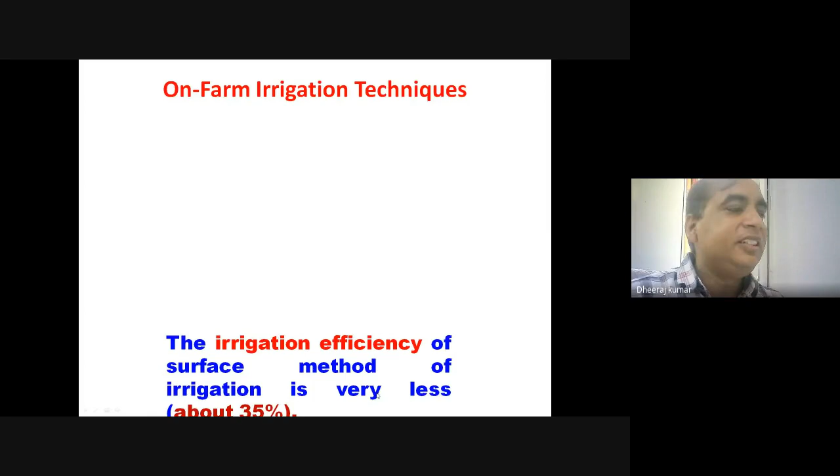Precision irrigation - the irrigation efficiency of the traditional method is only 35% or less, but in precision irrigation, efficient use of water is crucially dependent on advanced irrigation technologies. Until 50 years ago, crops in this country were irrigated by surface methods, and in that irrigation the efficiency was only 35%.

But 50 years ago, it was okay because our population was not up to 1.4 Arab - at that time it was only 30 or 35 crore population. At that time it was okay, but now, facing the problem of population growth, we have to use precision irrigation.

This is one type of precision irrigation. You see that there are drip lines and the emitters there. This is precision irrigation.

In recent times, the over-exploitation of underground water resources has resulted in an alarming fall in the depth of the water table in the command area. Due to the surface method of application, a lot of water is demanded, because we only use 40% of the water and the rest, 60%, we are just wasting as water loss. Because of this, we pump excess water from the groundwater, and this excess pumping is decreasing the groundwater table. There is an immediate need for selection of the appropriate irrigation method.

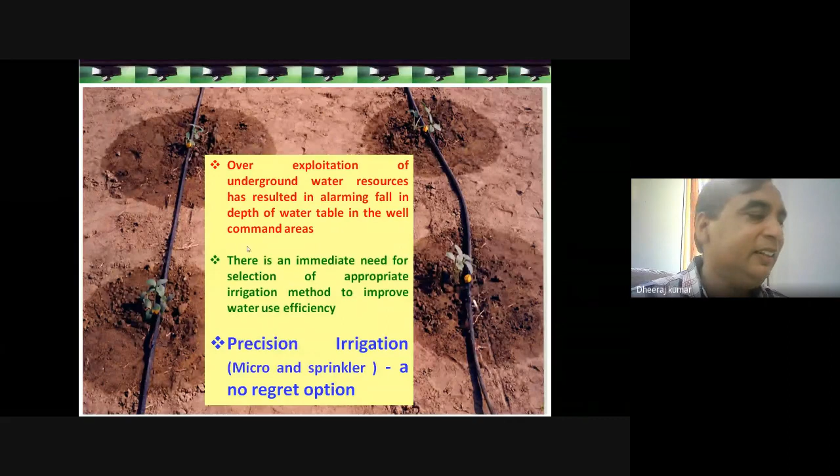If you want to stop this alarming stage, then you have to use the appropriate irrigation method, which can improve water efficiency. And this is done only by precision irrigation, meaning micro irrigation and sprinkler irrigation. In today's lecture, we will discuss micro irrigation.

Micro irrigation is an important agro-technique for efficient water use and efficient management. In micro irrigation, we provide the water and the nutrients near the plant root zone only. We are not wasting our water. We are not wasting our nutrients. We only apply the water for plant use. That's why we can get high irrigation efficiency, because we only apply the water near the root zone.

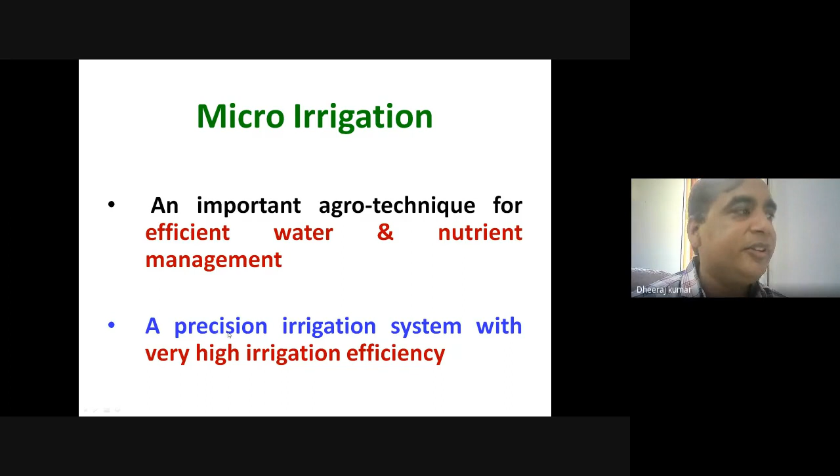There are no percolation losses. There are no weeds which can take our nutrients and water. Only the required amount of water is applied near the plant root zone.

Look here, surface irrigation efficiency is 30 to 45%, sprinkler is 60 to 70%, and with micro irrigation methods like drip irrigation, micro sprinklers, and bubblers, we can get 80 to 90% application efficiency. It means if you provide 10 liters of water to the plant, only 1 liter of water is wasted. 9 liters of water are provided to the plant and used by the plant.

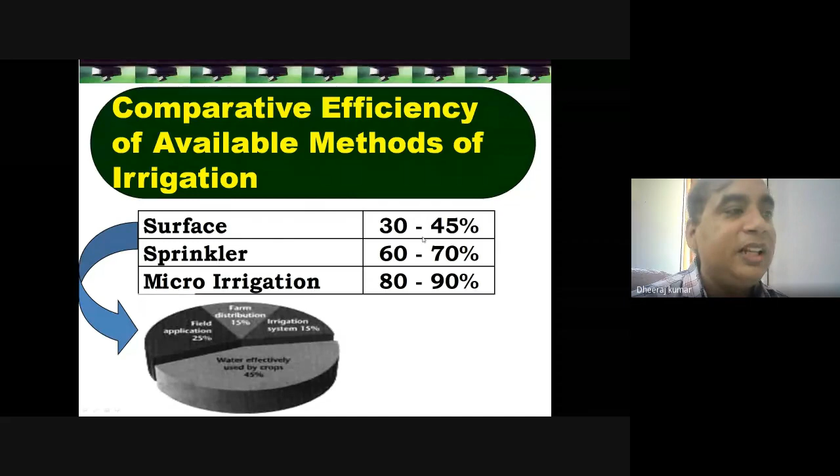In sprinkler irrigation there are 30% losses, and in surface irrigation 60% losses, meaning out of 10 liters of water, we are wasting 6 liters. These are some precision irrigation pictures; you are seeing drip lines there.

As for its development, it was first started in Germany in 1860, but Simcha Blass, an engineer from Israel, observed that a big tree near a leaking tap exhibited more vigorous growth than the other trees. Where water was leaking, he observed very good growth compared to the other plants nearby. That was observed by the Israeli engineer in 1940.

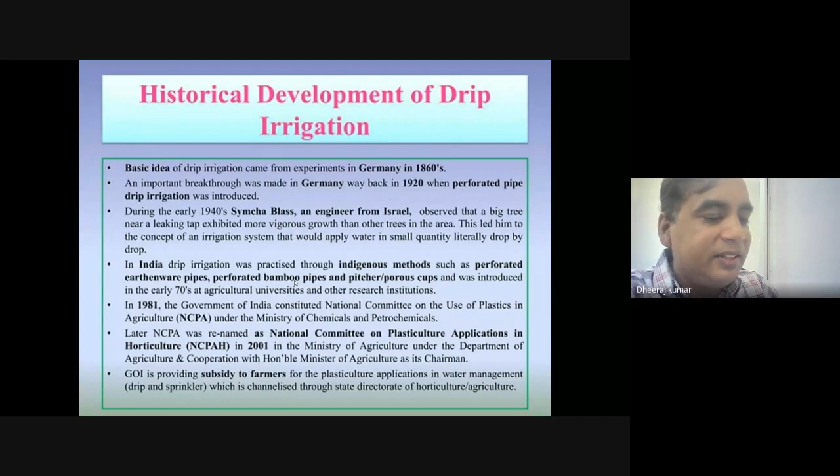After that, initially, it was implemented in the field in the form of clay pipes. We used clay pipes, perforated pipes, and bamboo pipes. But as soon as plastic was developed and commercialized, we adopted plastic in farmers' fields, with better cost management also.

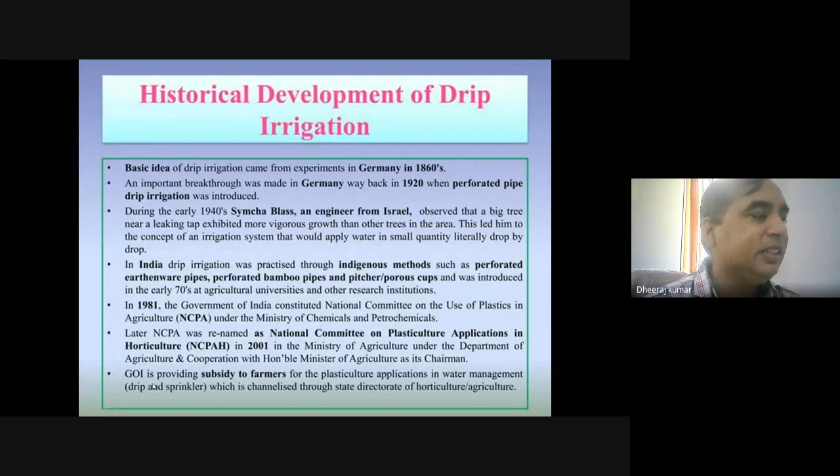In India, it was taken up by the National Committee on Plasticulture Applications in Horticulture in 2001. At present, the Government of India is also providing subsidies to farmers to install the different systems in their fields. These subsidies vary from state to state. Some states give a 50% subsidy, some give more or less than 50%. It depends on the location, the state, and the area, meaning hilly areas or plain areas, and on the condition of the farmers.

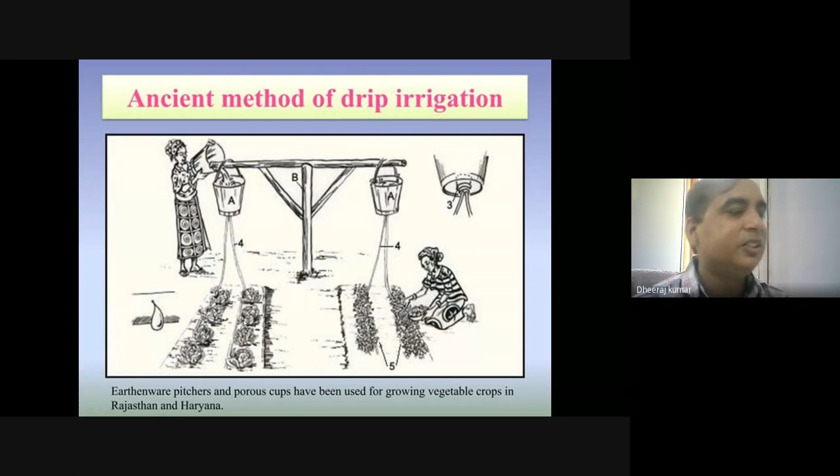Why micro irrigation? You can get efficient, effective water use and efficiency of fertilizer by this method. It means water is only applied near the plant root zone and there are no percolation losses. Only field capacity is maintained in the drip system.

Fertilizer use efficiency is higher because fertilizer is only applied near the plant root zone, and it is applied by the irrigation system. So in this, we provide water soluble fertilizer, and we inject this fertilizer in the lateral lines.

An agrotechnical advantage is that there is no soil compaction. Compaction seals the soil surface, which can reduce aeration and ultimately reduce the yield of the plant. There is no interference with farm practices. You can easily carry out your farm practices and agricultural practices.

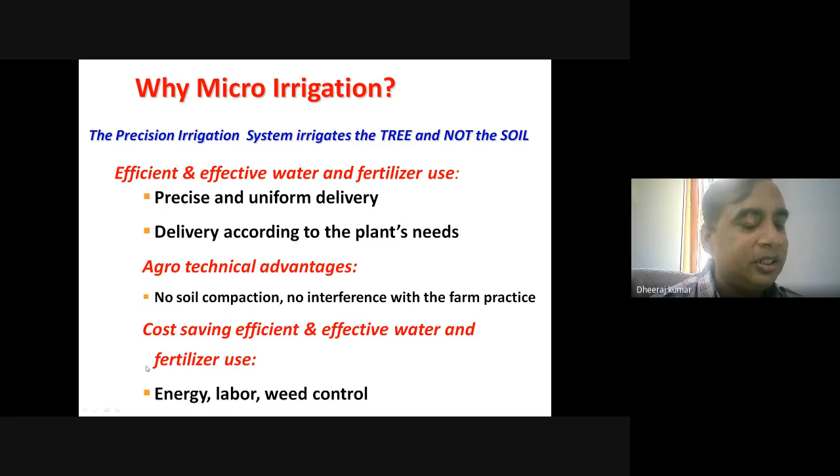It is cost effective, saving water, fertilizer, energy, labor, and weed control also. Only water and fertilizer are applied near the root zone, so no weeds will grow near the plants because you are not providing them nourishment, water, and nutrients.

What is the advantage of the drip system or the micro irrigation system? The advantage is 40 to 60% saving of water, and yield increases 20 to 50%. It reduces labor cost and gives highly uniform distribution. In this system, we can get a uniformity coefficient of 80 to 90%. It means water is uniformly distributed to all the plants.

There will be no soil erosion or evaporation. There will be no runoff over the soil surface. The water you apply to the plant completely infiltrates into the soil. If water does not flow over the surface, then there will be no erosion and no evaporation. Water is applied in optimum amount.

It also helps control disease, pests, and weeds. In deep percolation, no water will reach beyond the root zone. We can reduce deep percolation, and surface runoff and evaporation losses can also be minimized by this method. You can also use poor quality water with this method. In our area we are also facing poor quality water, and in this system we can use it with some chemical management.

High return per hectare we can get by this method. You can grow optimum crops and multiple crops in a season or a year. High water use efficiency, meaning about 90% water use. No need for drainage systems, since water is not lost to surface runoff or beyond the root zone. Fertilizer efficiency will be higher.

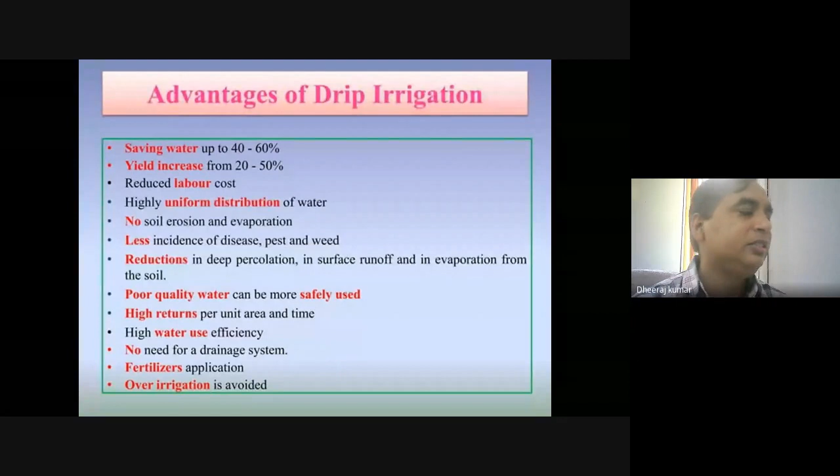The disadvantage of the drip system is that it requires very clean water, because if you do not use clean water, there will be a problem of clogging of the emitters. We have very small openings in the emitters, and if you introduce high density leaves in the water, your emitters may clog. The small openings can be clogged by soil particles, organic matter, mineral sediments in the water, and algae growth.

Sun radiation also affects the life of the drip system, because drip system components like laterals, main lines, sub main lines, and emitters deteriorate with time if the sun falls directly on the surface of the emitters and laterals. It will reduce the life of the drip system.

Our system can also be damaged by animals, rodents, and insects. Animals may look for their food fallen on the system and can destroy our system. Rodents and insects can chew the components and damage our systems.

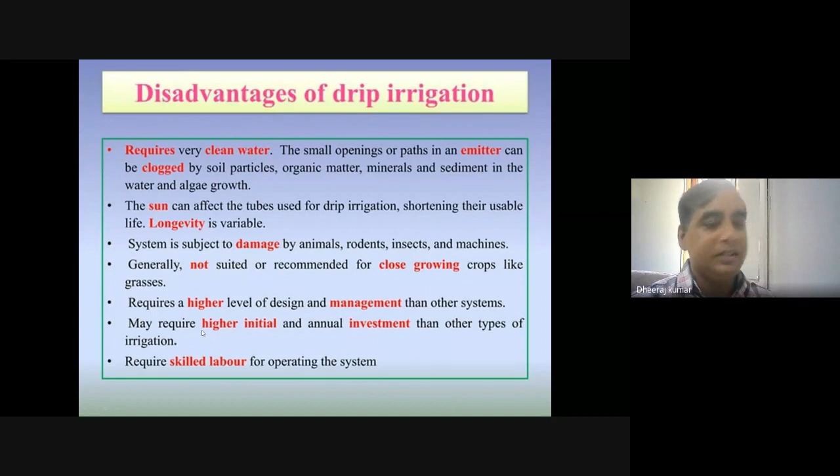In precision irrigation, we can get the answer to four questions: how much, when, where, and how. How much water we can apply, we can do by precision irrigation. When we have to give water to the plant, at which stage the plant requires more water or less water, we can manage by this system also, precision irrigation.

And where we have to apply the water, only to the root zone, we can do by this method. With surface methods like border, we can't get the answers to these questions. And how, which method we can use, like sprinkler, micro sprinkler, drippers, bubblers. We can use these methods in the system.

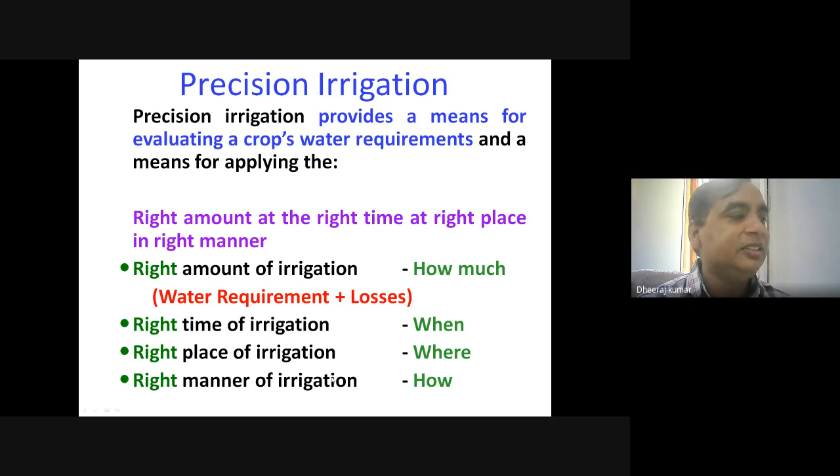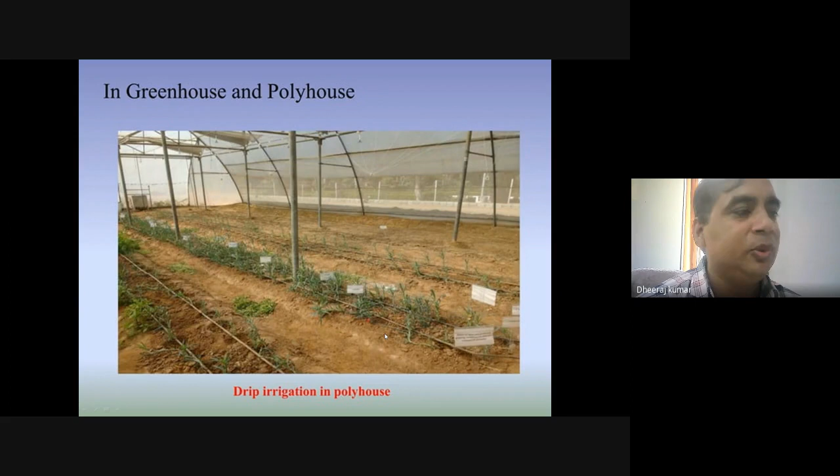If you are investing too much money on a polyhouse, then you also use the optimum amount of water, and the optimum amount of water you can monitor only by drip system methods. Means we are using the drip system in the polyhouse.

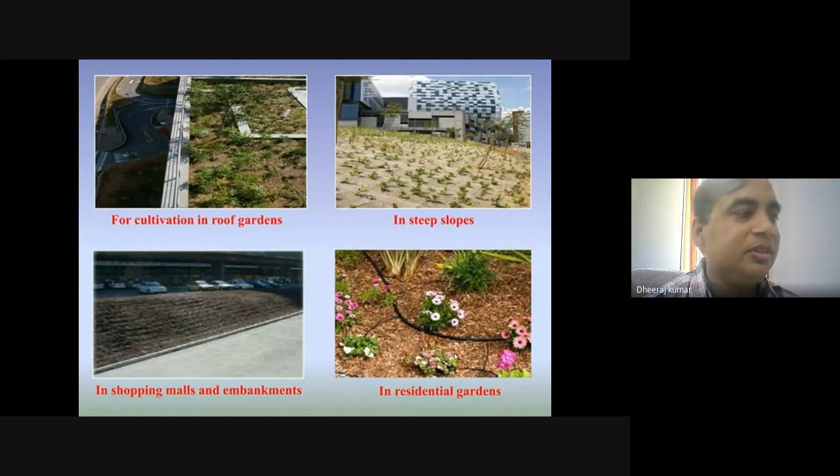Terrace also, if you want to plant some horticulture crops or vegetable crops on your roof, then you will not use the surface method. You will use only drip system methods. Steep slopes: if your area has steep slopes and you provide surface water, it will run off, all the water will go down. But on steep slopes, you can use the drip system method. Residential gardens, kitchen gardens, shopping mall embankments, we can use the drip system method.

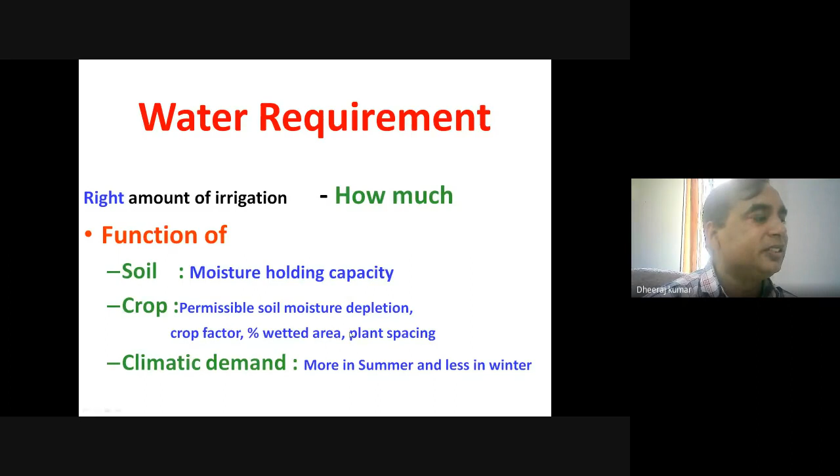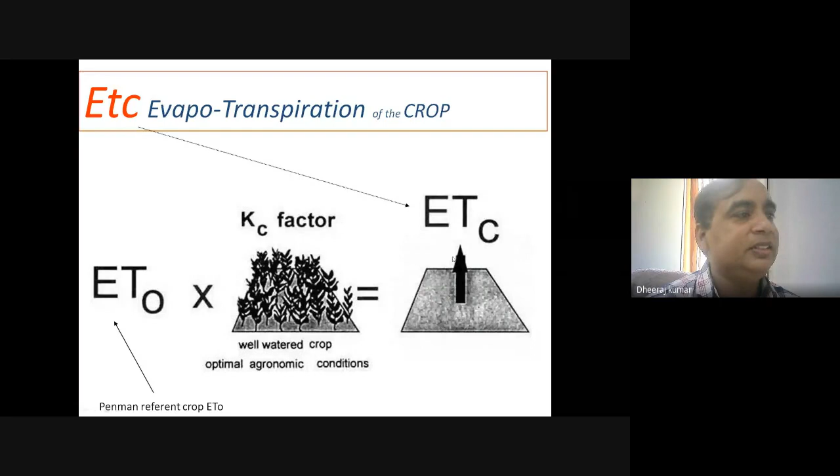The water requirement, right amount of irrigation, means how much. It depends on the soil water holding capacity and percentage wetted area. These are the factors for how much water to irrigate. To calculate how much water, there are some formulas, like the pan coefficient, pan evaporation coefficients, or many different methods to calculate the ET0. And ET0 is then multiplied by the Kc factor. Kc is the crop coefficient factor. Then you get the crop water requirement, the ETc in mm per day.

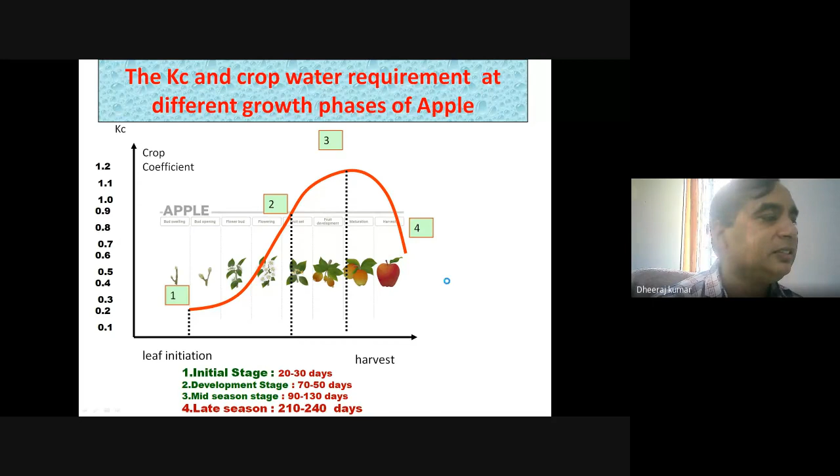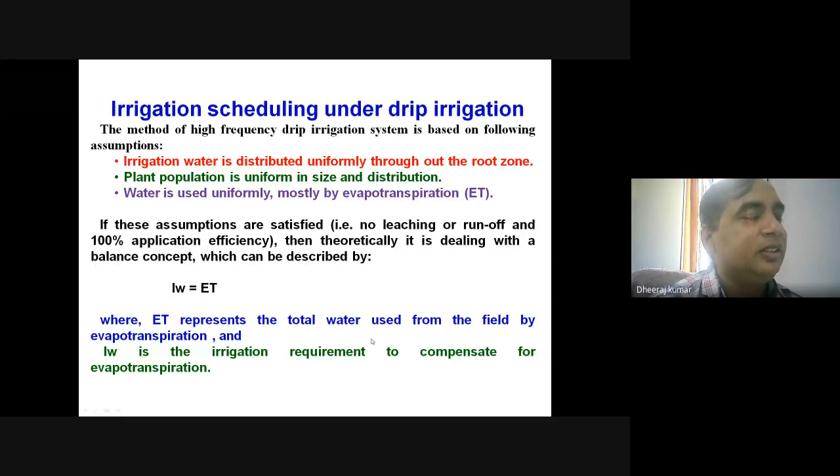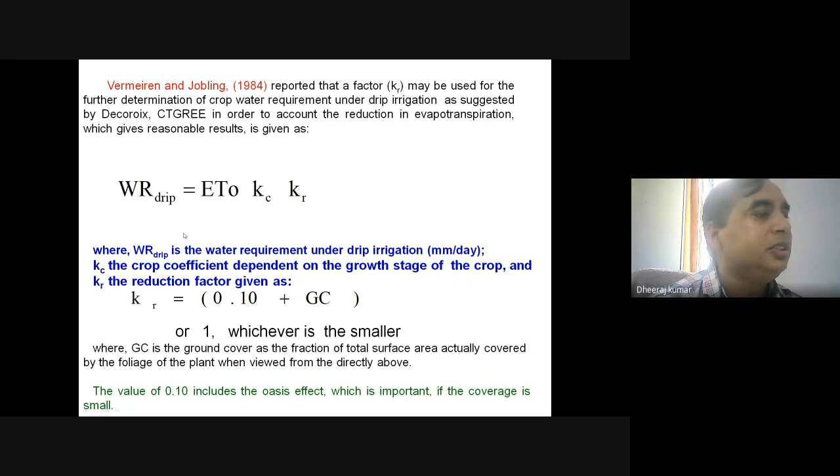We can do the irrigation scheduling on the basis of ET. ET is calculated by different methods, and ET tells you how much water demand is to be applied to the systems. There is a formula for water requirement: it is ET0 into Kc and Kr. Kr is the reduction factor, and the reduction factor is calculated by 0.10 plus GC, ground cover. If you multiply Kr, Kc, and ET0, then you get the water requirement of the plant, meaning how much water is applied from the irrigation systems.

These are some technical terms which we use in irrigation: saturation, field capacity, wilting point. At the saturation stage, all the pores of the soil are filled with water. But at field capacity, some amount of water is drained by gravitational flow, and the remaining amount in the soil is at field capacity. It means the pores are partially filled with air and water. When water is maintained at field capacity, plant growth and yield will be maximum. If the tension keeps increasing up to the wilting point, the plant just starts to die.

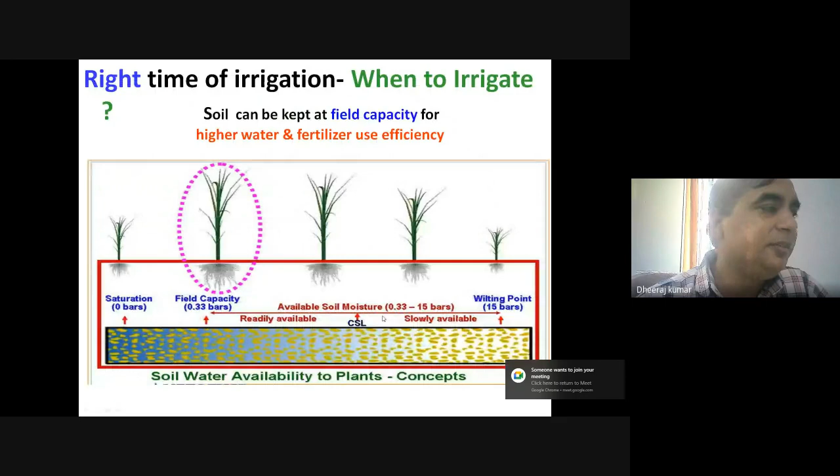There are two terms, permanent wilting point and ultimate wilting point. At the permanent wilting point, if you give water to the plant, it can survive. But at the ultimate wilting point, if you give water, the plant will not survive; it will die. At the permanent wilting point, the soil moisture tension is about 15 bars, and at the ultimate wilting point, the soil moisture tension is about 30 bars. So in the drip system we maintain the water up to field capacity.

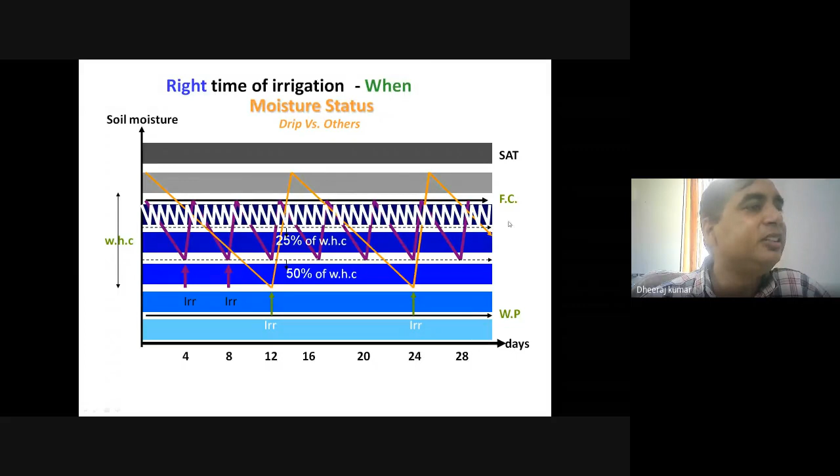You see the different curves. This zigzag line shows the water lines maintained by the drip system. This line indicates sprinkler irrigation. The drip system maintains the water in the soil at field capacity. With sprinkler irrigation, when soil water is reduced by 25%, we provide water through the sprinkler. And in this method, when 50% of water has been reduced in the soil, we provide water through surface irrigation methods. So only the drip or precision irrigation system maintains the water in the soil up to field capacity, which means you can get high yield.

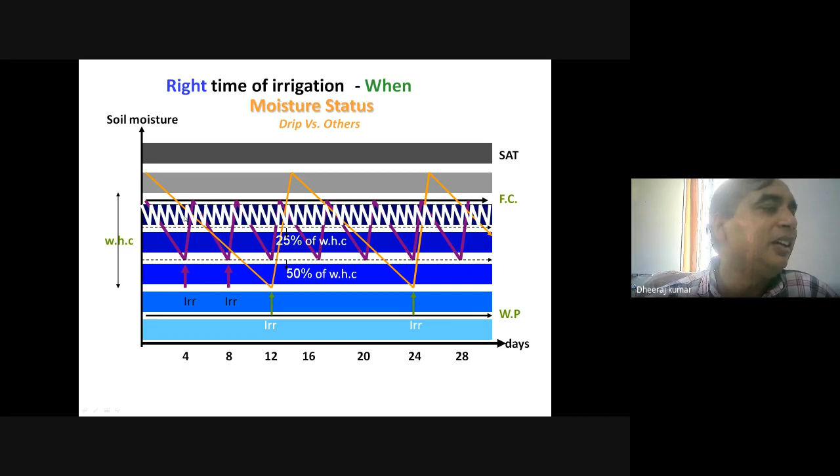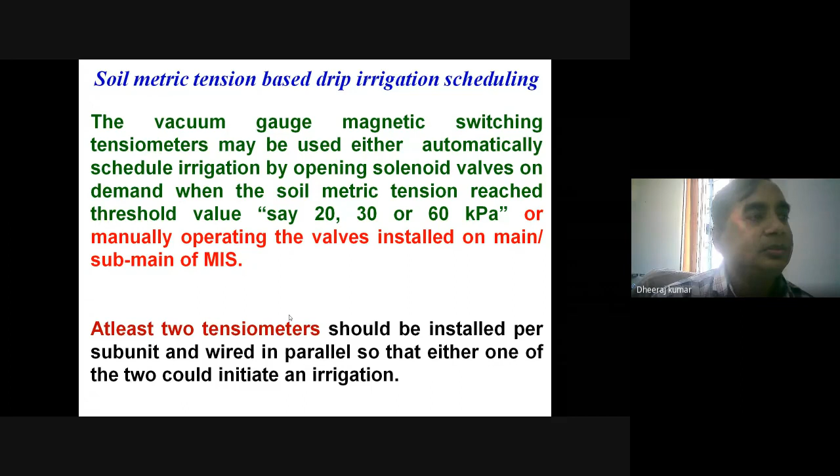We have different methods to measure soil moisture, like the tensiometer we generally use. There is TDR also, but the tensiometer is a very cost-effective method, while other instruments like TDR are highly costly, so we use the tensiometer. This is a tensiometer. We insert it in the soil, and the tensiometer tells how much water is going down, meaning how much tension is in the soil. According to that tension, you can schedule your irrigation.

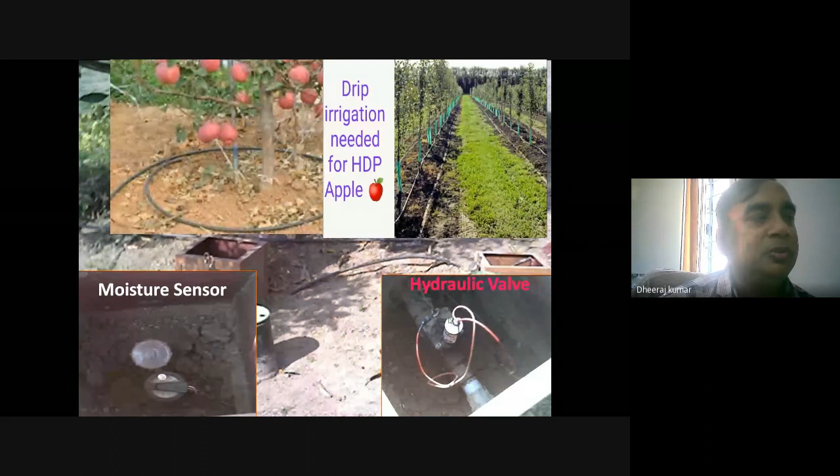We use some electronic devices such as a solenoid valve. They get the signal from the tensiometers, and according to that, the valve turns on and off. If water is going down, it automatically turns on, and when water is going up, it automatically turns off the water to the lateral line.

These are some tensiometers. We have provided tensiometers at different depths. You see, of the plant root depth, the first 25% gets 40% of the water. It means up to here only 40% of water is extracted by the plant. If we go down the next 25%, then 30% water is taken from that depth. If you go a further 25% depth, then only 20% water is extracted from the soil. In the last 25% depth, only 10% of water is extracted by the root zone. According to this, we have installed our tensiometers.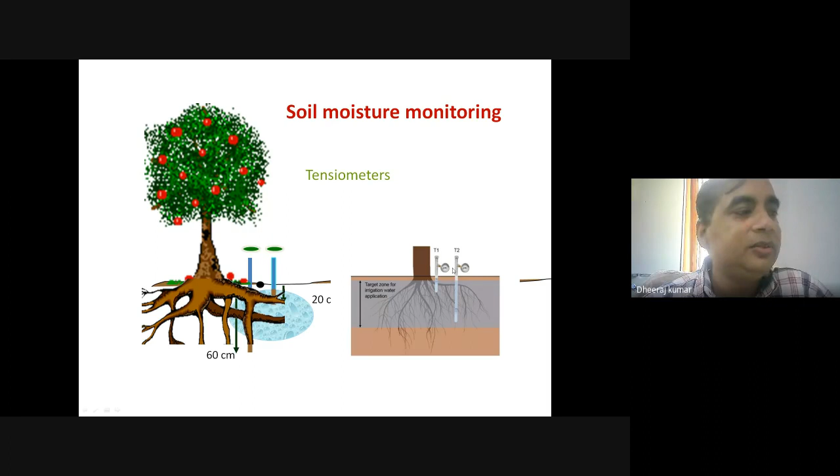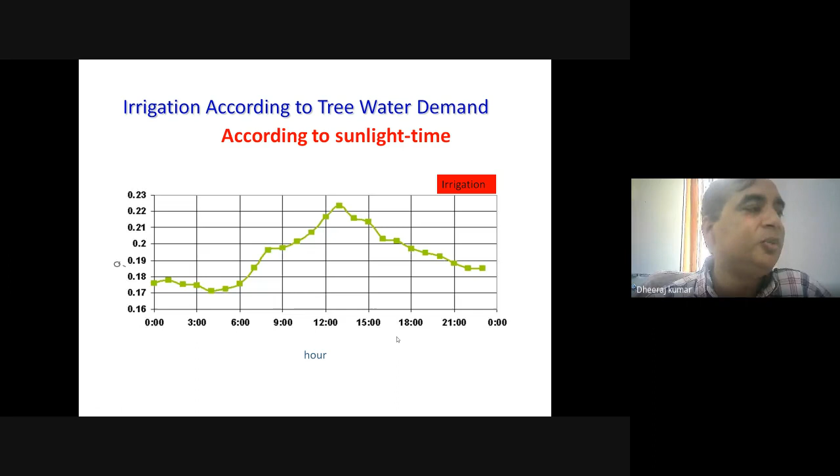This is the water requirement. Water requirement will be high between 12 o'clock and 3 o'clock in a day because at that time sunshine on the surface is maximum. It means evapotranspiration is maximum, the transpiration rate is maximum, and water loss is maximum.

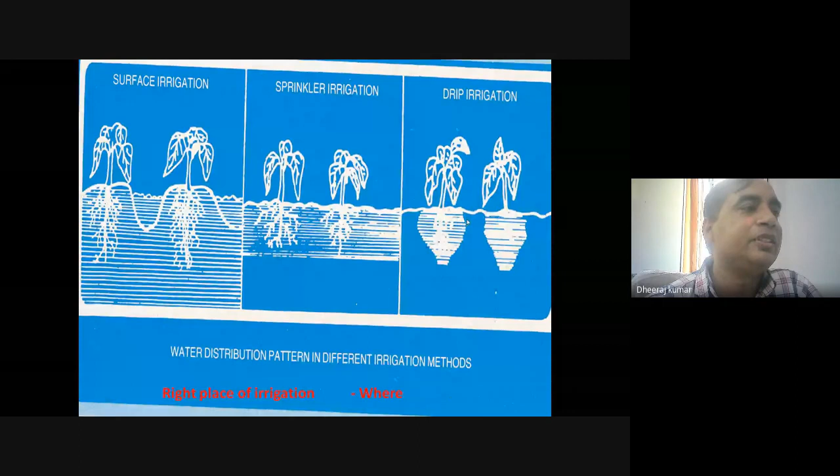There are some examples of the water pattern in the soil surface. The drip system irrigates only the root zone. But in sprinkler irrigation, a little more water is spread beyond the root zone. And in the surface irrigation method, you can see there is percolation also. That's why we get lesser water efficiency in the surface irrigation method compared to drip methods.

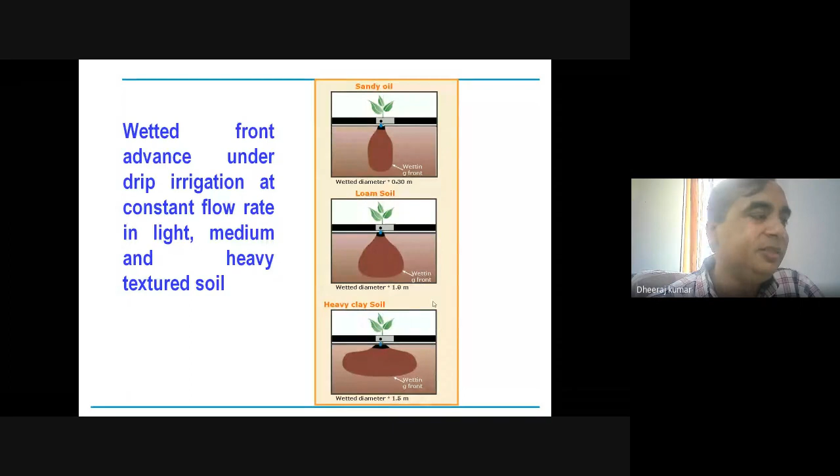These are the waterfronts. Waterfronts are different in different soils. If you see sandy soil, then water will go deep down, and the waterfront will be like this. If you see loam soil, then there will be horizontal movement and vertical movement also. But in clay soil, the vertical movement is very less compared to the horizontal movement. It means in sandy soil, more water will go down.

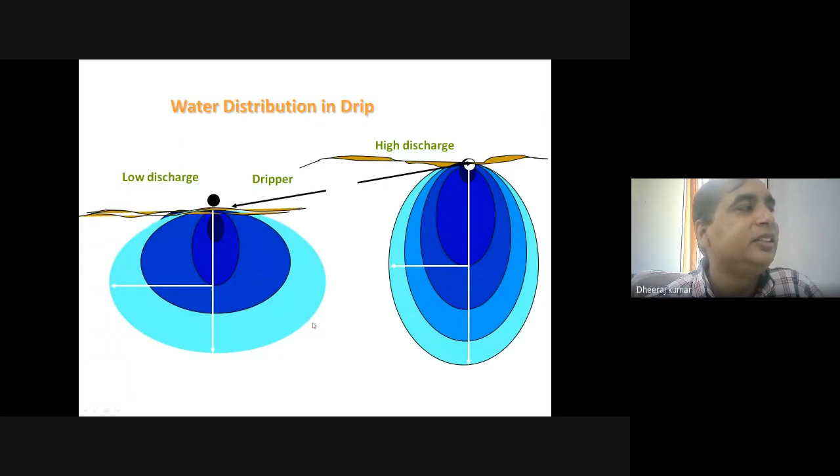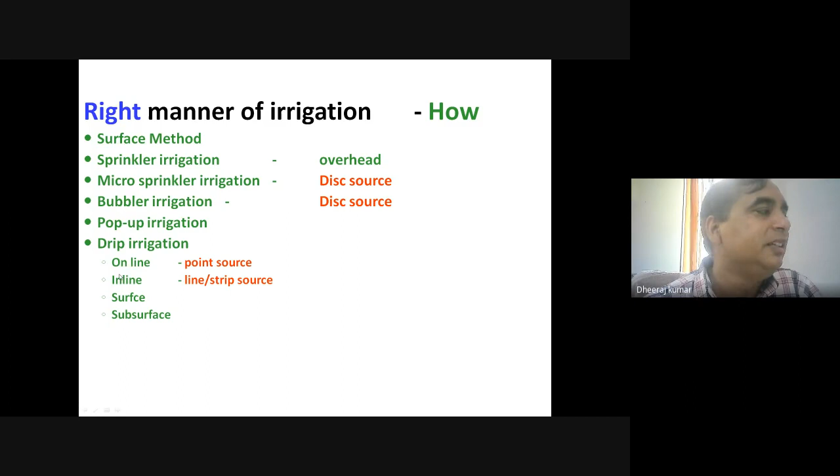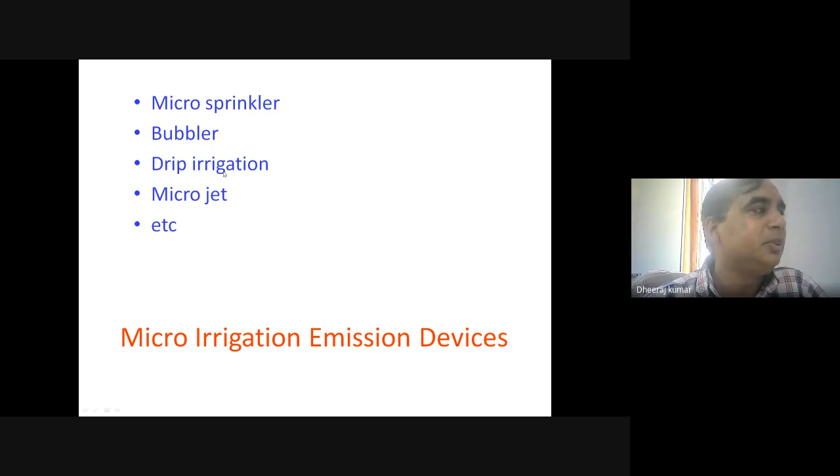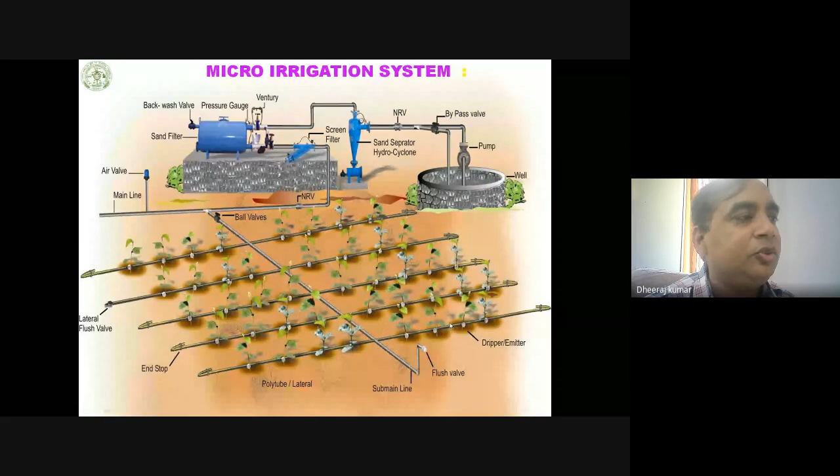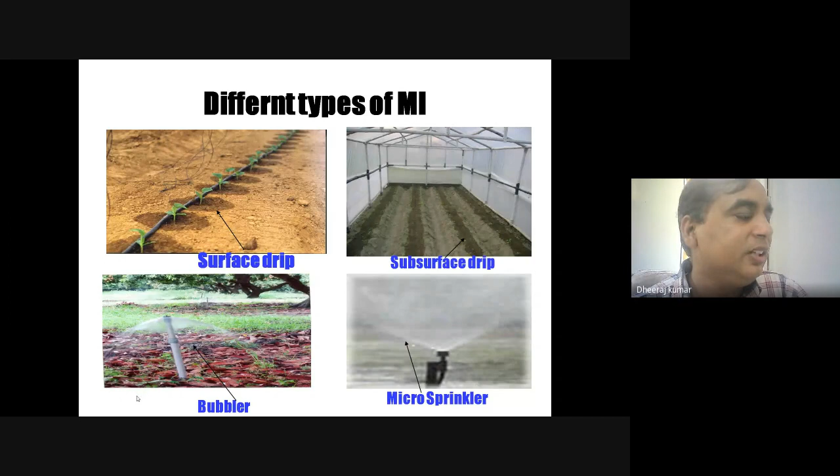This is the bubbler system. In the bubbler system, water is applied in the form of fountains, but the discharge is much less compared to sprinkler irrigation, and the water spreading distance is also much less compared to sprinkler irrigation. The discharge of this is about 450 liters per hour.

These are the micro sprinklers. For micro sprinklers, the distance is also very limited.

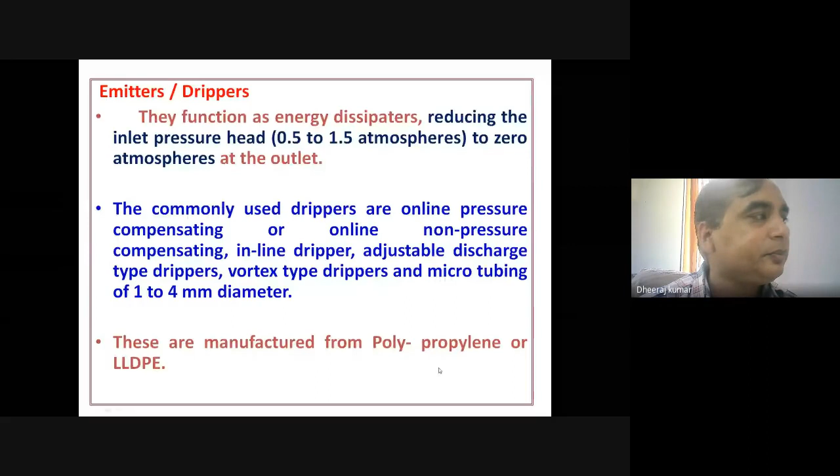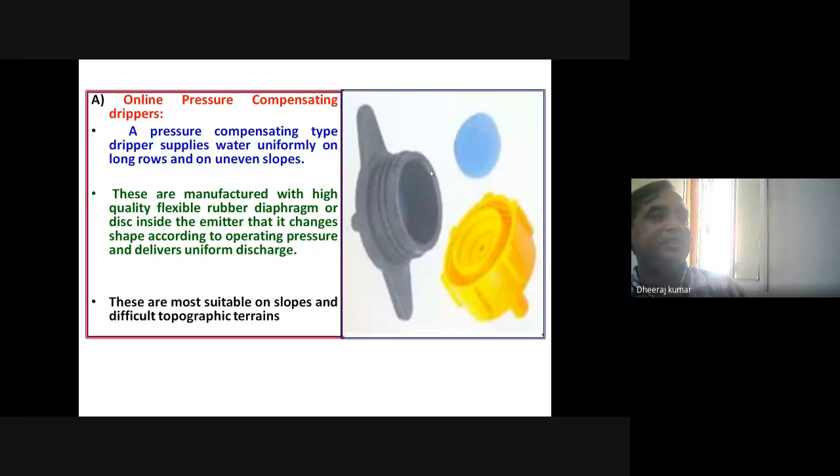These are the emitters, and there are two types. We use online pressure compensating emitters. This means in hilly areas, when you lay your lateral lines with the drip system, there are chances to develop different pressures at the lower end of the drip line. If you don't use a pressure compensating emitter, it will disturb your water uniformity pattern, meaning at the lower end, water will be delivered more compared to the higher level of the system.

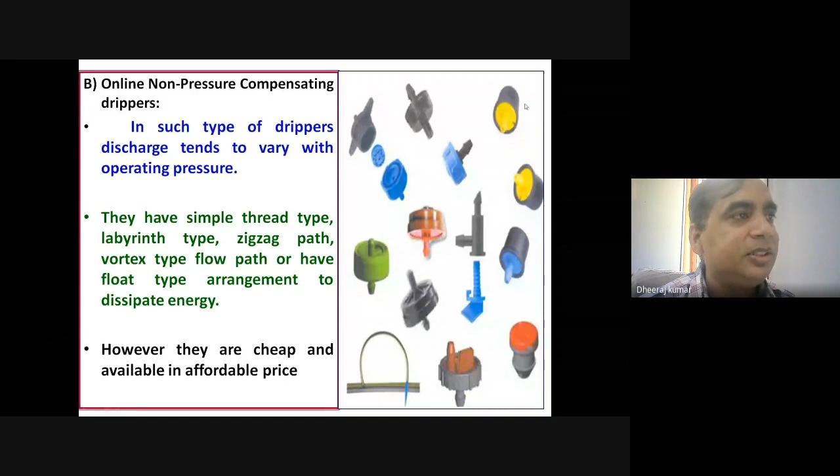There are some examples of non-pressure compensating emitters, such as the inline emitters. These are emitters that, when the company manufactures a lateral, they insert the emitters inside the lateral at the time of manufacture. Here you can see the emitters inside the lateral line. These are the inline emitters.

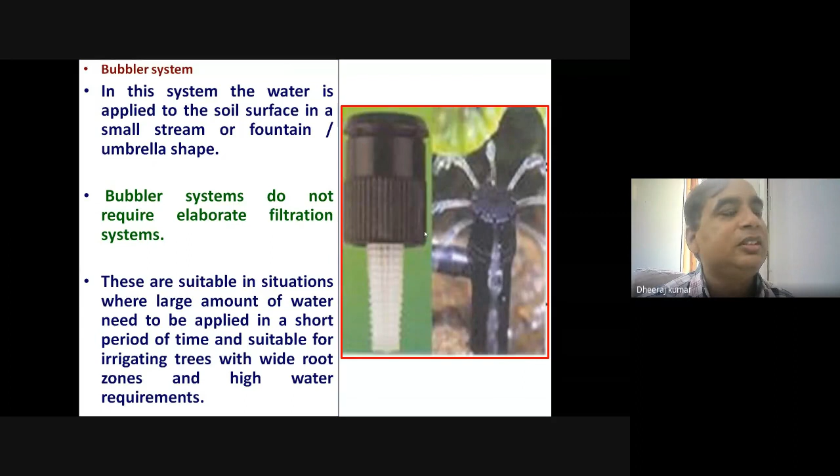These are the bubblers, the bubbler system. The bubbler system is also used like a micro system because it delivers a high amount of water, so we can use it for crops with particularly high water requirements. These are the micro sprinklers.

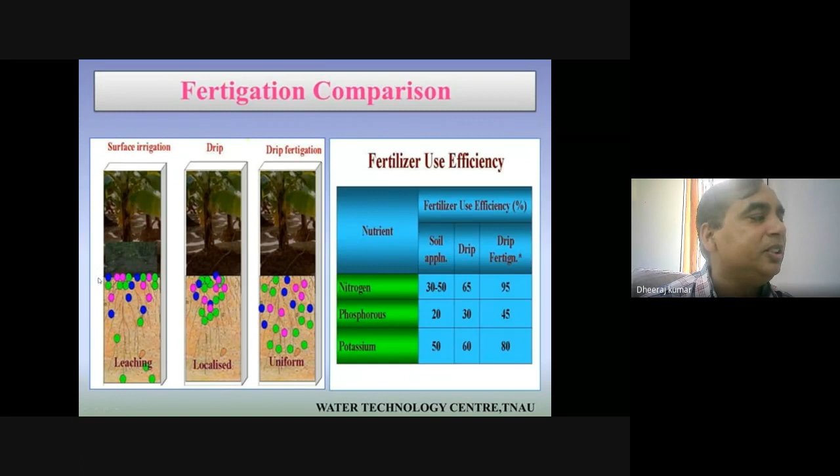We use a fertigation unit because in a drip system, we apply water and fertilizer near the root zone. Comparing surface irrigation methods with drip irrigation methods, in surface irrigation you can see that the applied fertilizer undergoes leaching, going down below the root zone. But in the drip system fertigation method, fertilizer is applied only near the root zone and is evenly and uniformly spread there, which is not possible in the surface system.

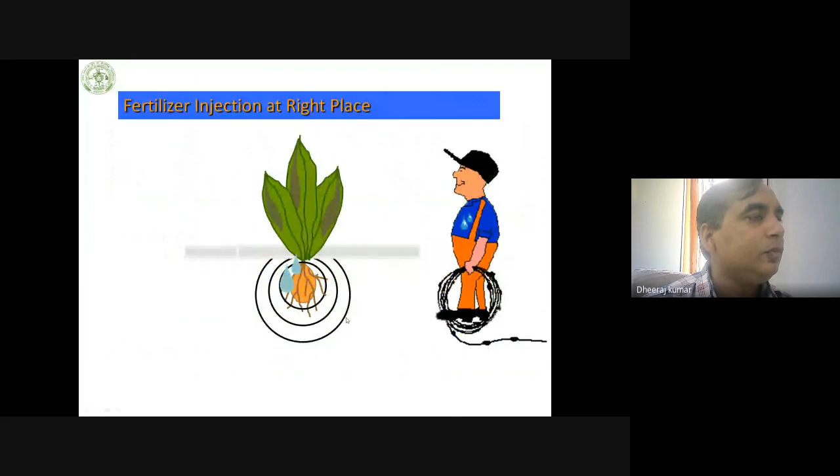These are some methods of fertigation. Fertigation is applied by venturi systems and the fertilizer tank, just like this pressure pump, the fertilizer pump.

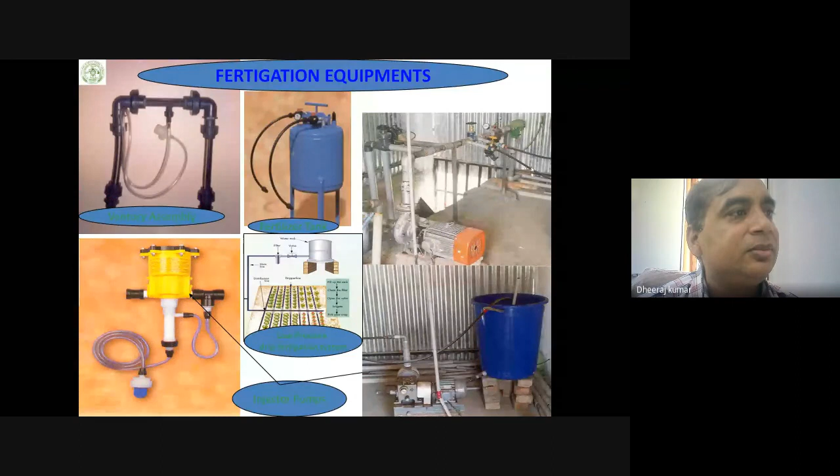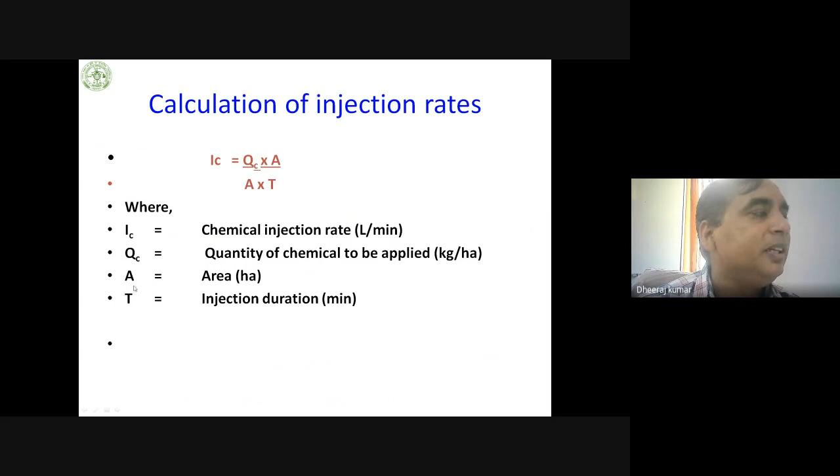For calculation of injection, we can use this formula Ic = Qc x A / A x T, where Q is the quantity of chemical to be applied, A is the area, and T is the injection duration.

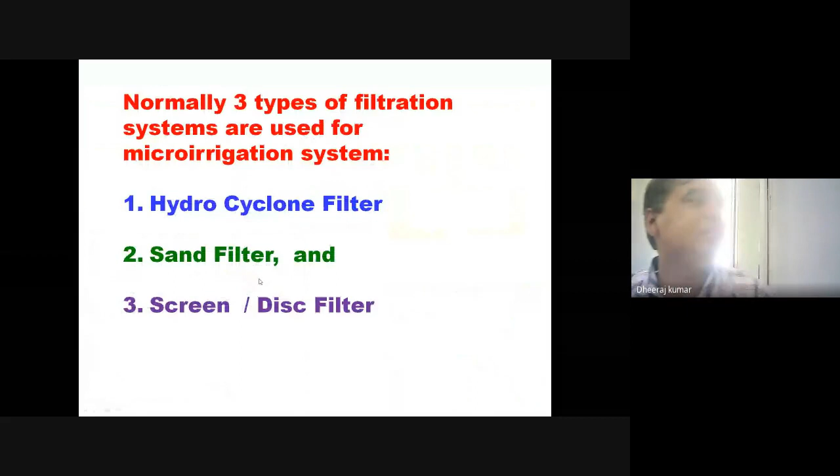Now I'm telling about filters. Different types of filters we use in the system, just like hydrocyclone filters, sand filters, screen filters, and disc filters. These are the three filters we use in the drip system.

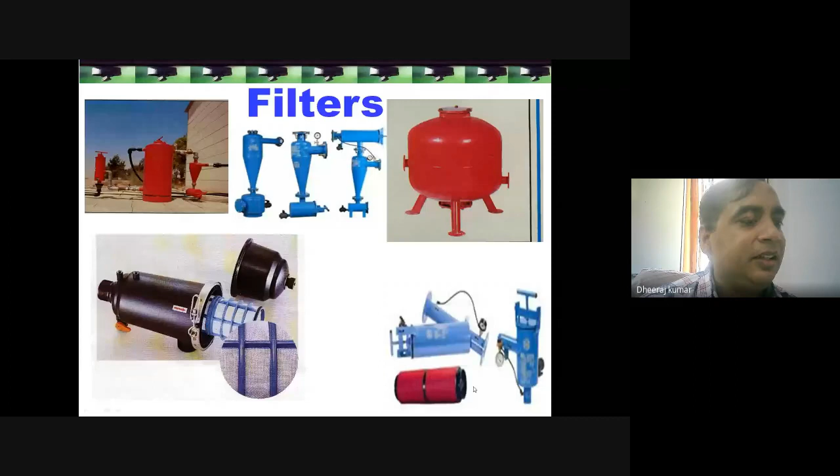You see the screen in the screen filter. You see the discs mounted on a bar, and they are pressed together. This has some grooves from where clean water comes out.

This is the hydrocyclone filter. This is the sand filter. This is an example of filters.

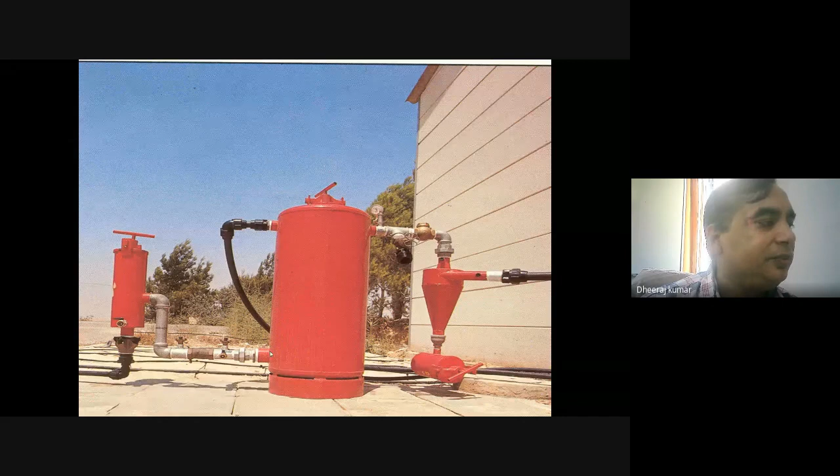This shows the working of the hydrocyclone filter. Water is coming from this side, from one section, and it carries centrifugal force, moves like this, and goes down, then lifts from the center.

Clean water is lifted from the center, and the particles with high density are collected at the bottom. This is cleaned by particular time, and that can be moved from here, as this section is showing.

This is the hydrocyclone filter working shown here. High density particles attach here and slides down, collecting at the bottom of the tank, while clean water goes up and into the main line.

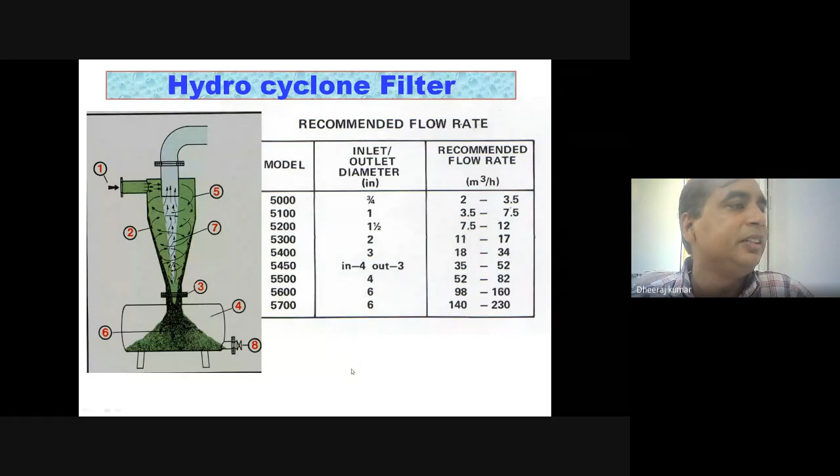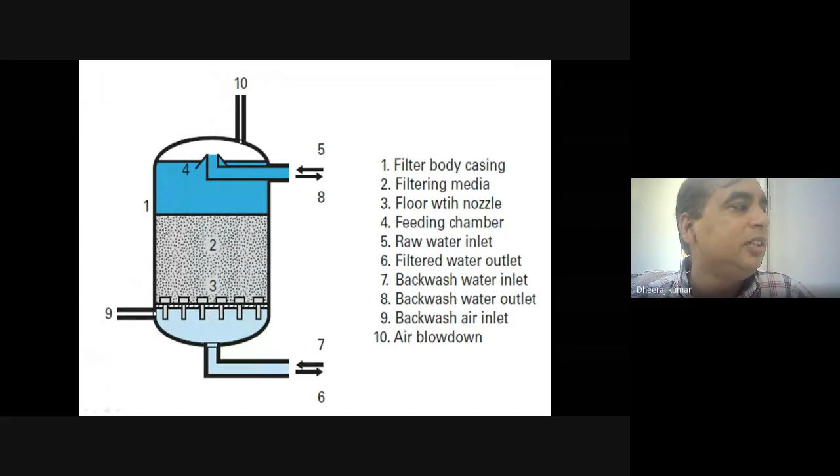This media traps the dirt particles, and the trapped particles are removed by air, while clean water goes down and then out from this section.

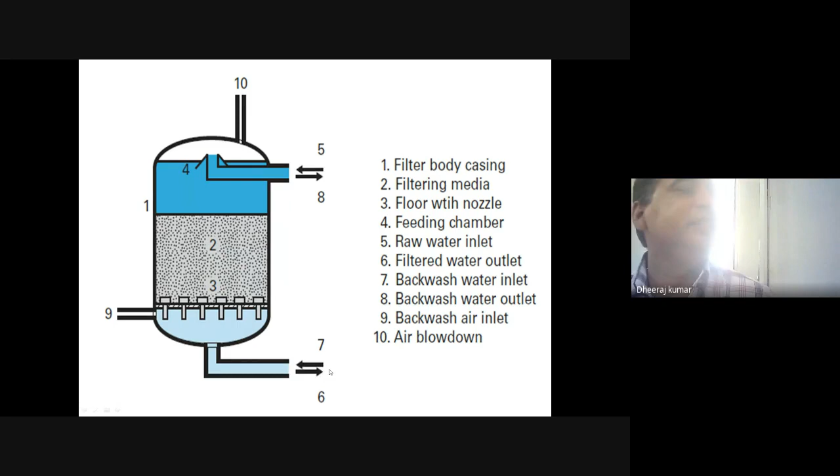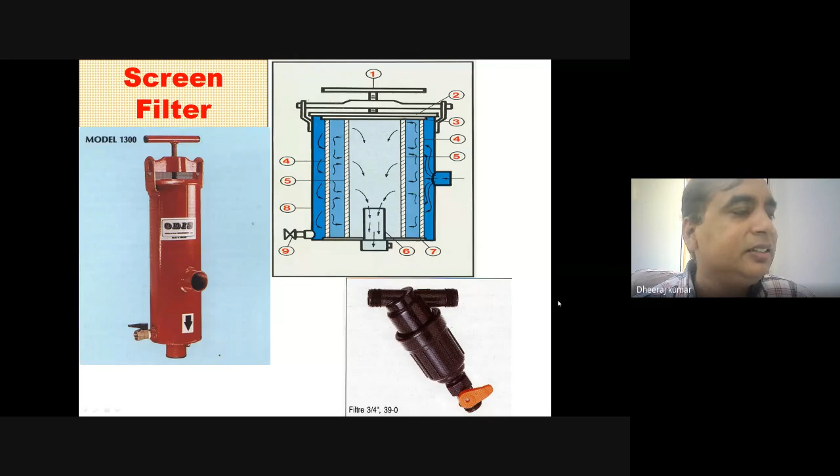The particles are trapped by the screen, and this section goes to the outlet, while this is the inlet of the screen filter. These are some models of the screen filter.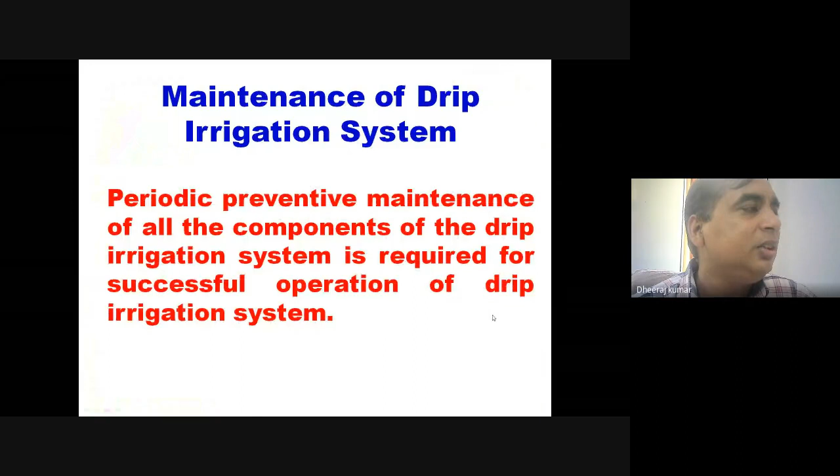Now we will discuss the maintenance of the drip irrigation system. If we don't maintain our system properly, there are chances of lesser uniformity coefficients. For this, we have to maintain the structure.

First, we have to maintain the filters. Then we have to maintain our emitters. If you install the drip system, sometimes animals work in the field and disturb the straight portion of the lateral, which may disturb this section. Then you have to maintain this one also — the lateral lines.

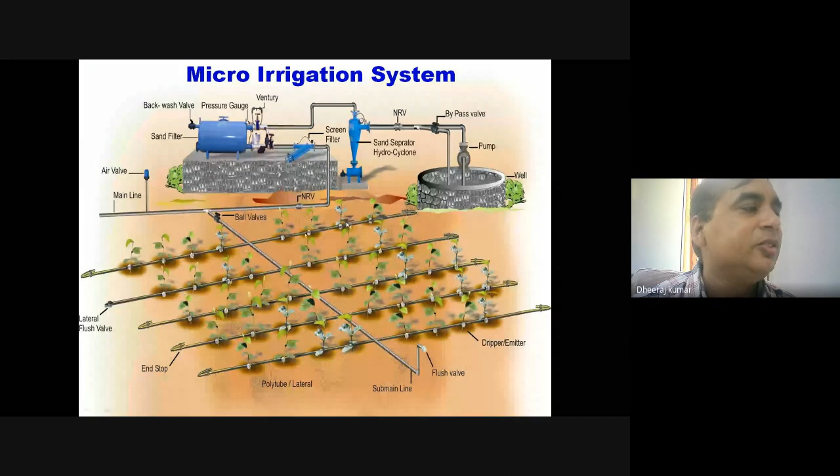We are maintaining the emitters. We open this - this is the emitter, these are the emitters. We open them from the head of the emitter and clean them.

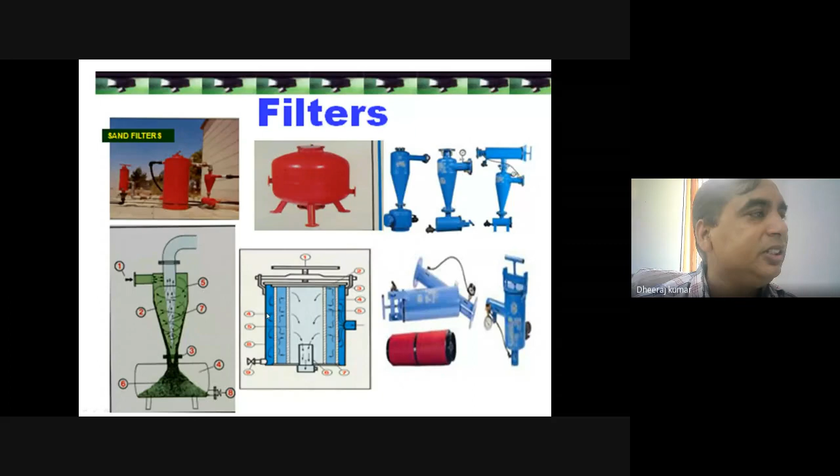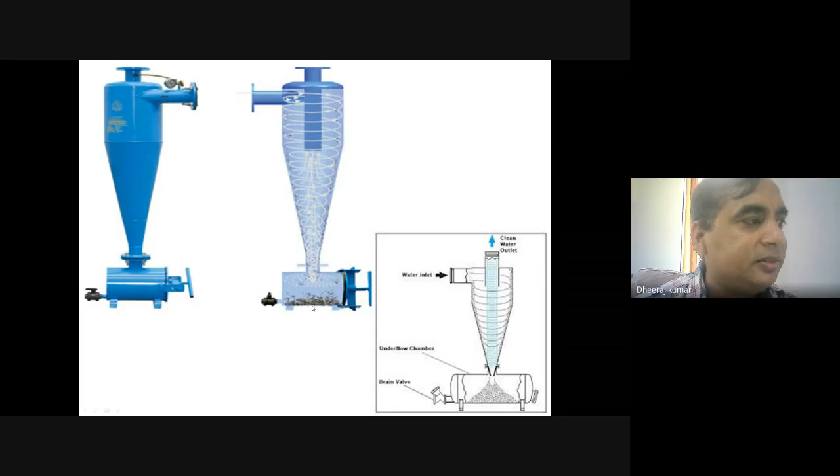These are for filter cleaning. In filter cleaning, the first one is the hydrocyclone. The particles are collected at the bottom of the chamber, and we remove this chamber by opening this section to clean the particles.

Sand filter - how do you operate it? There is some automatic system in the sand filter, with a bypass assembly and a bypass valve. Water is coming from this, and in a regular, normal condition.

Water comes from this section, goes down, and cleans here. There is some media which traps the particles, and clean water goes down in this direction. But in the backwash system, we reverse the flow of the water.

We reverse the flow of the water - this gate valve we close, and this gate valve we open. The water comes from this side and goes to this side, through the media, and goes upward, lifting the trapped particles out. This water goes to this section also, and after 5 to 10 minutes of backwashing, our filter will be clean.

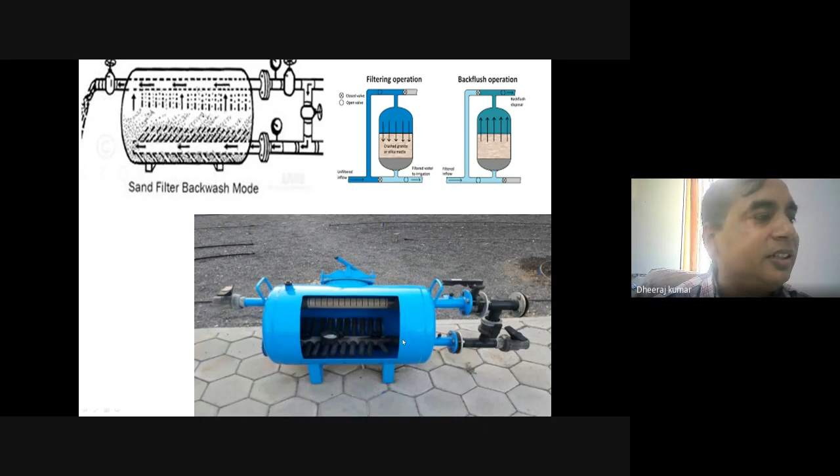Here are some plates, like candles, and here we fill the media. The media is sand or larger particles that we put here. This is the screen filter.

We open this section, take out the screen of the filter, wash it manually, and then put it back. These are the screen filters, these are the filters.

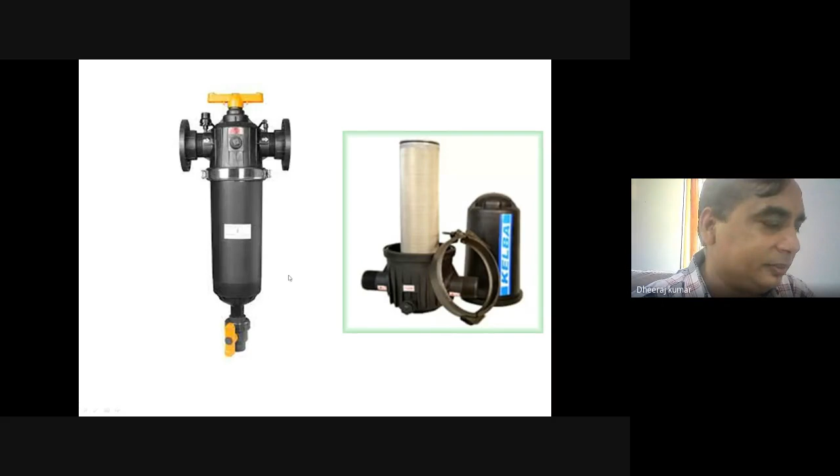Similarly, this is here - we take out the disc from here, clean it with water, and then put it back. This is the maintenance here.

These are some fertilizer equipment - pressure tanks, venturi injector, and injection pump. These are the fertigation units we use in the drip system also.

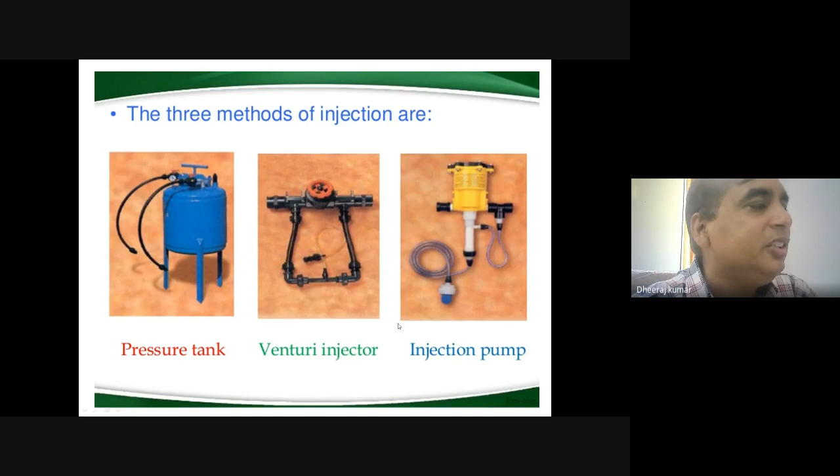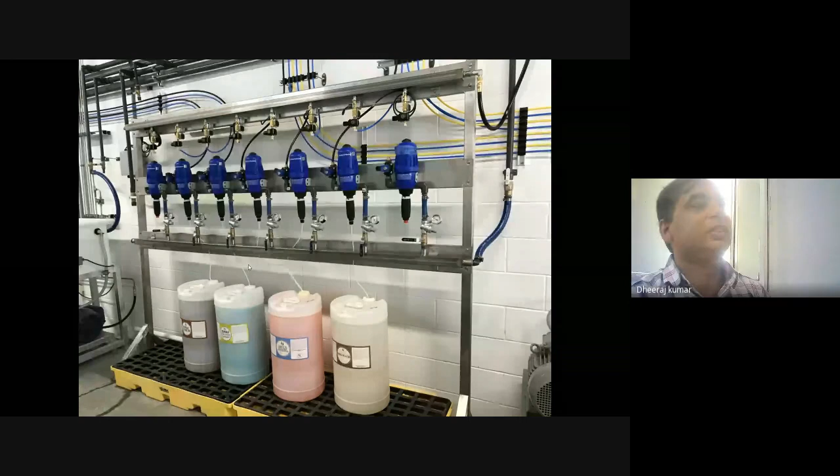These are some chemical injectors - pressure pumps. There are chemicals depending on your conditions; we can also use pesticides and other chemicals using these attachments.

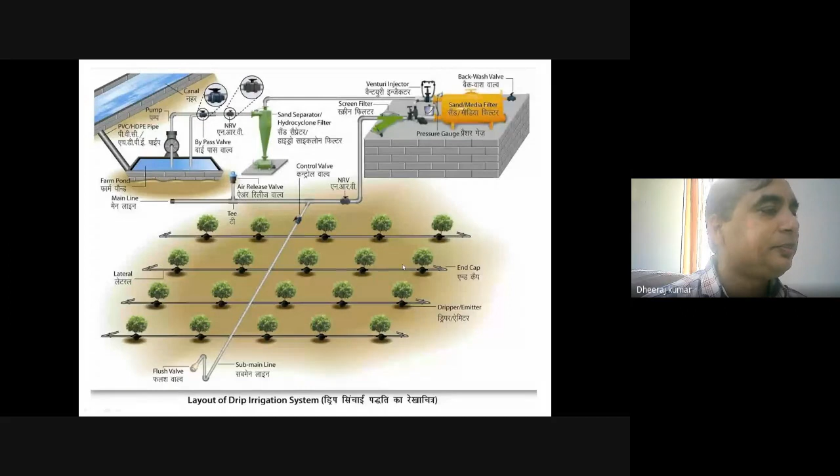These laterals are made of linear low density polyethylene, and come in sizes of 10, 12, 16, and 20mm. These emitters are made from polypropylene material, and the laterals are made with black colored linear low density polyethylene.

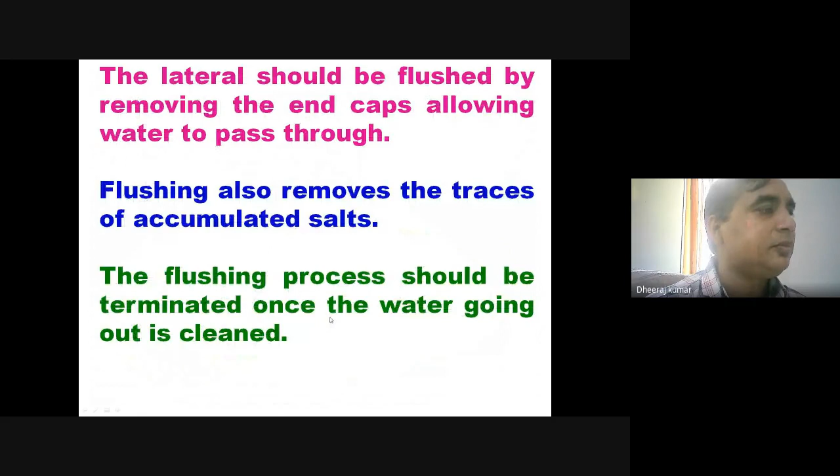We take some chemical treatments - acid treatment, because there is a chance of algae growth, which we reduce with chlorine treatments. Some hardness deposits precipitate in the lateral line, which we can remove using acid treatments.

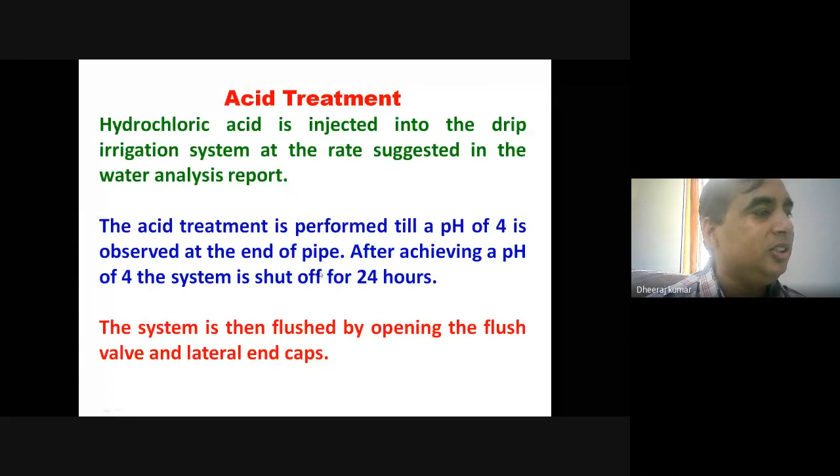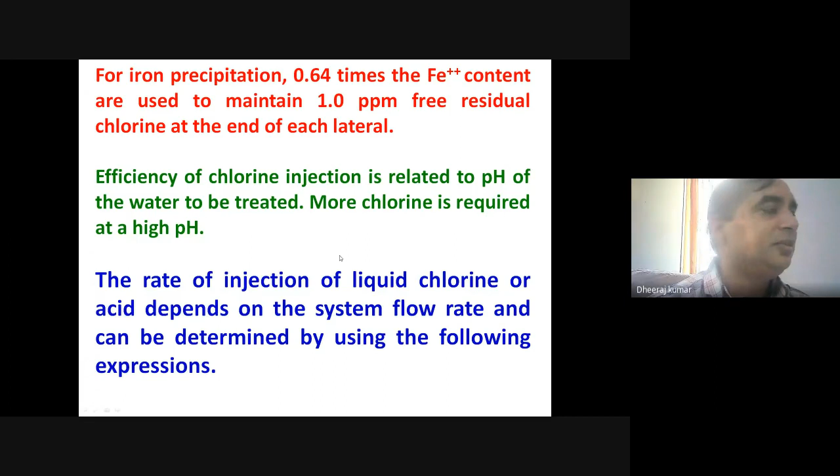These are some slides about the drip systems which I have shown you.

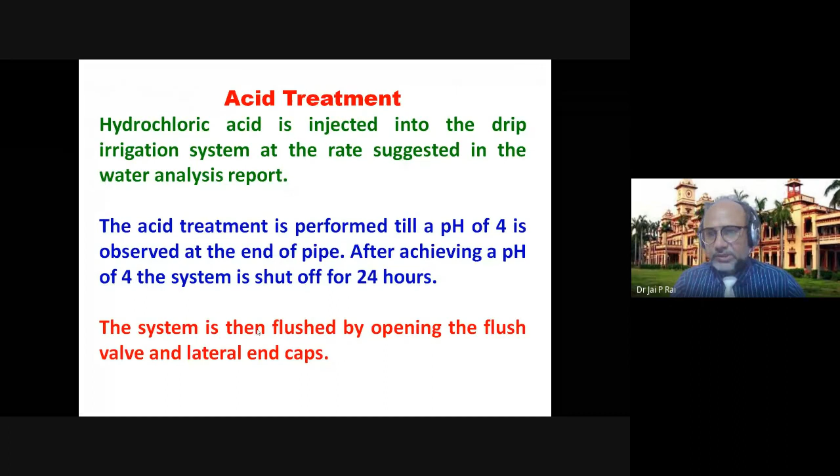There are a couple of questions from Dr. Asma Sherwani for you. Her first question is: how do weather forecasts and real-time data influence irrigation decisions in precision systems?

So at present we are working... yes, pardon sir, I'll repeat the question again. How do weather forecasts and real-time data influence decisions in the precision system?